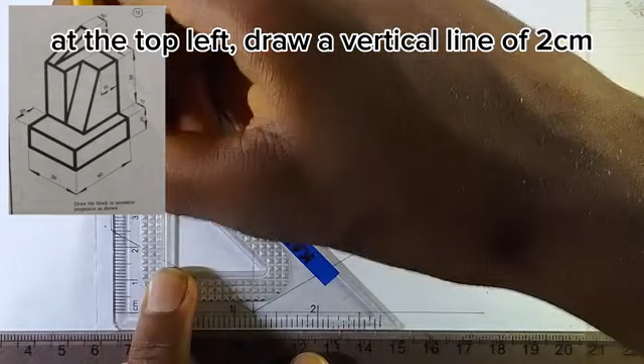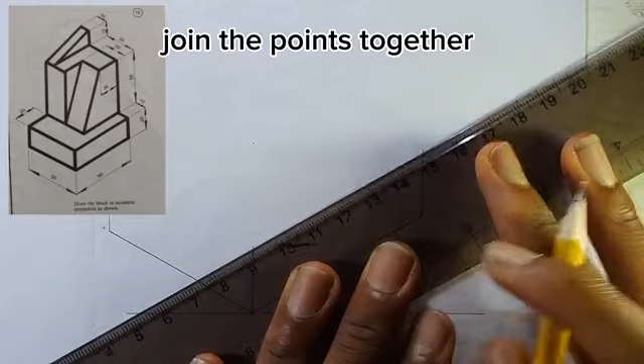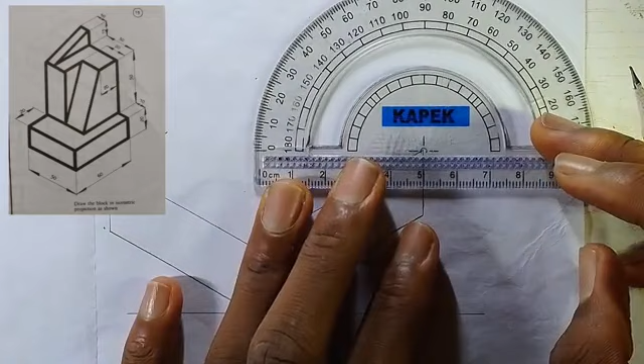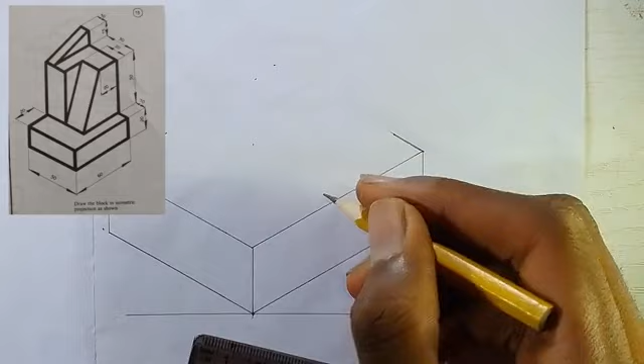Here, mark off one line of 1 cm. Instead of just drawing a line anyhow, come here and mark off 1 cm. Total distance from here to here is 6 cm, and distance from here to here is 2 cm, and this is where the block stops and continues from here. So since here is 6 minus 2, that's 4, here will be 4 cm.

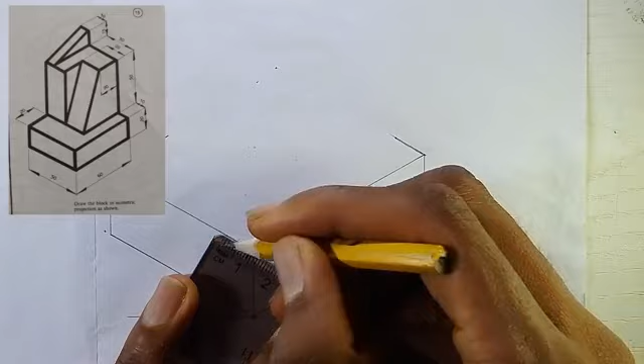So first mark off 1 cm rather. This is giving us 1 cm. Good, so come here, then from the back side draw 4 cm. 1, 2, 3, 4. Good.

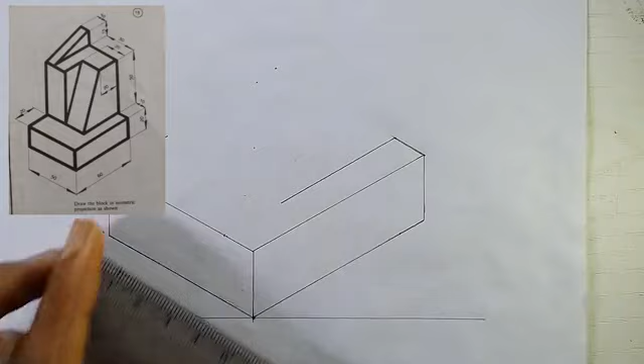Then after doing 4 cm, we draw this part too. And here is also giving us 4 cm, plus the extra space of 1, total of 5, so corresponding with this, at this part draw a vertical line.

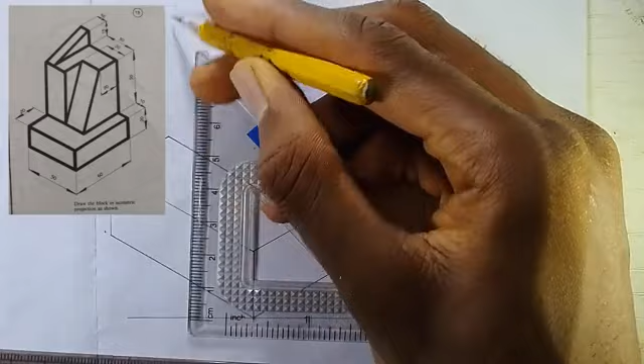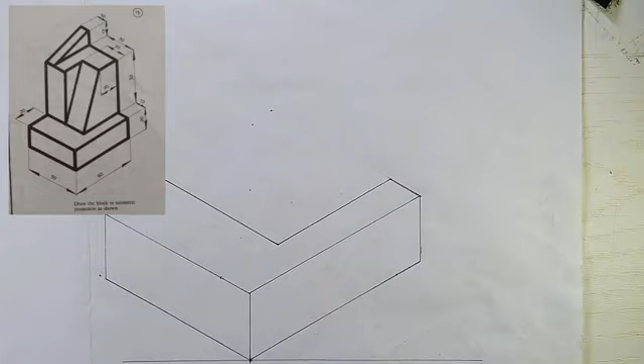Here it's giving us a total of 5, so draw 5 centimeter. We have our 5 centimeter. We also come here and draw 5 centimeter, the vertical line of 5 centimeter.

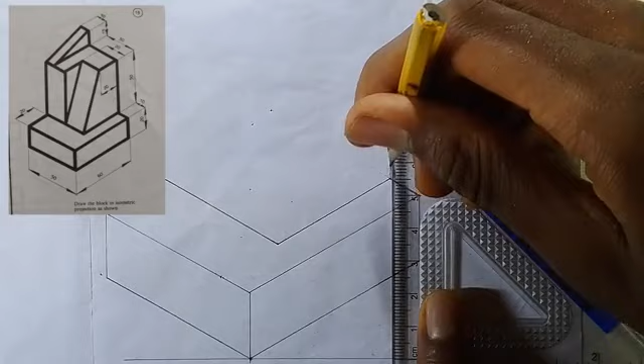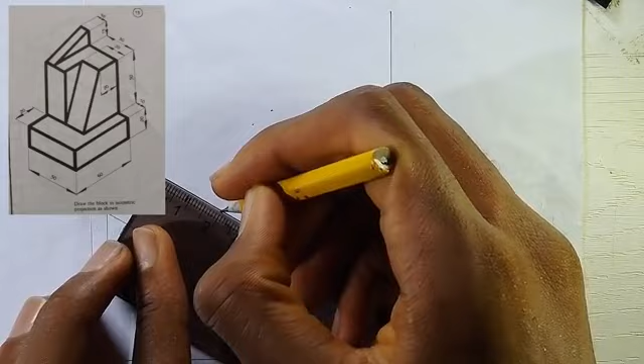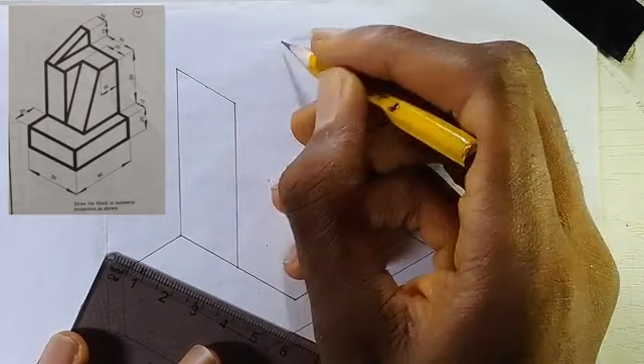So we'll come to this point and pin and mark 2 centimeter here. After marking that, we'll extend the line upwards, 5 centimeter to like others. Join this point here. Here is 2 centimeter, so we'll first come to this part, mark it, divide it into 2 here. Then we'll extend this part as we draw a line of 30 degrees, which is 4 centimeter.

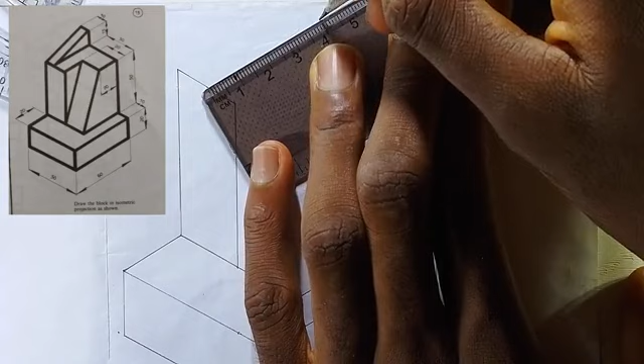So come here, mark off 30 degrees, then so this is it. Then this other one is giving us here 2 centimeter.

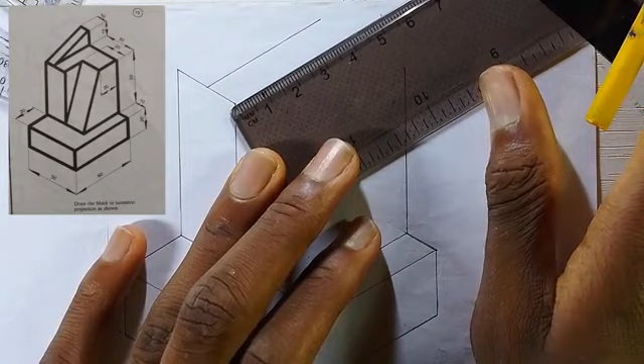So this other part here is 2 centimeter, so here it's giving us 2 centimeter. So at this point draw a line of 2 centimeter. After doing that, we'll join these 2 points together from here to here. Then join these other two together.

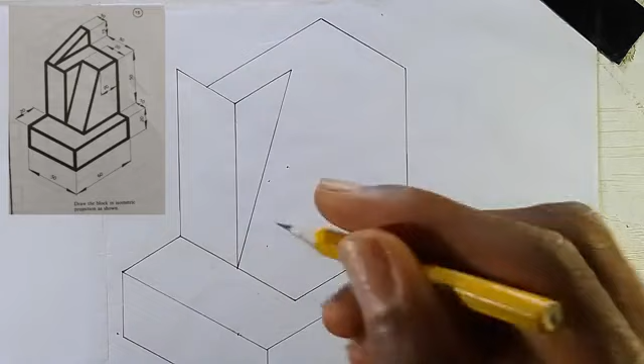Good, so it depends on how you want to draw. That will determine how your work will start, how it will end, how you construct it. My procedure for drawing this block is different from how other people would draw it, but we'll still have the same results, so you can follow mine. The point is, you need to first understand what you're given before you can decipher how to draw the given block.

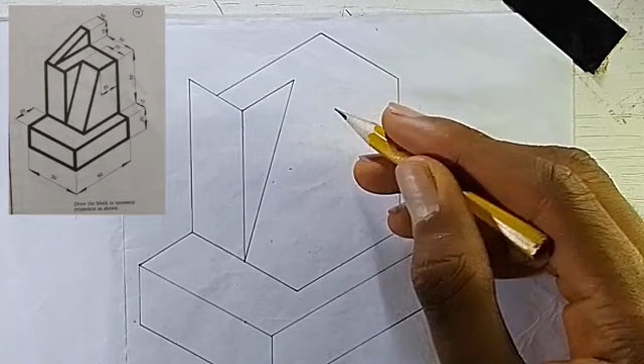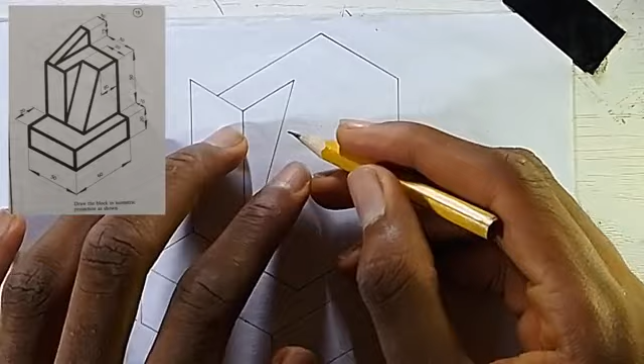So here we're having 2 centimeter, then we'll join it together with this one. What I'll do to get my 2 centimeter is, since here is 3 centimeter and here I'm having 1 centimeter, from here I'll just pin or mark off 2 centimeter. So from this straight line I'll just mark off 2 centimeter, which is here. Good, so I'm not going to draw, I'll just mark it off.

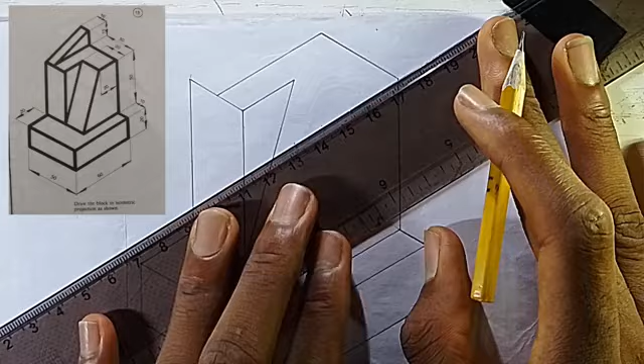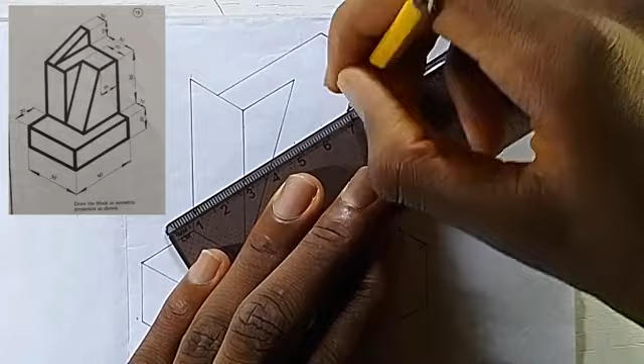So we have this, enough for us to get the shape, and this other part is going to be 2 centimeter. I'll first draw, I'll now draw 2 centimeter from here in order to have this part. So you draw 2 centimeter from here, so we're able to have this part. So we'll now join this part here, then place that part together.

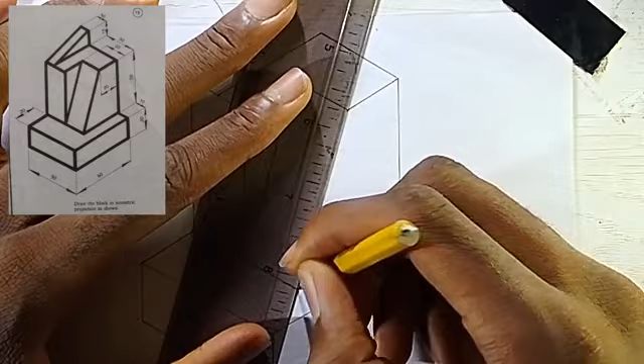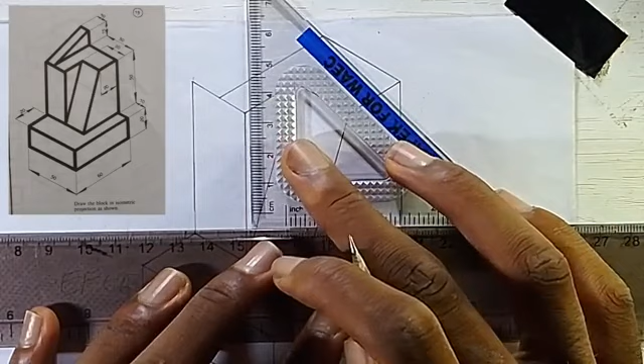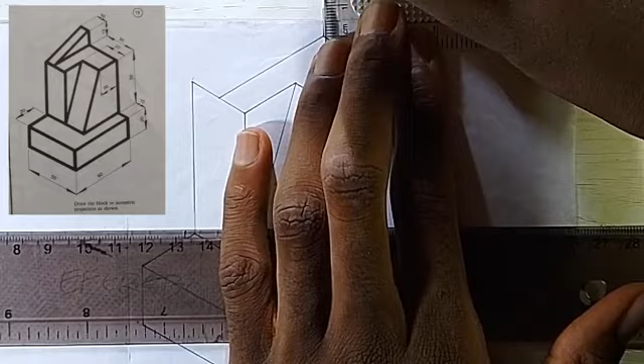1.5 cm. So first draw it so it's not able to enter. So we come here and have our 1.5 centimeter. So it's 1.5 here, then we'll join these two parts together. So that's what we are giving.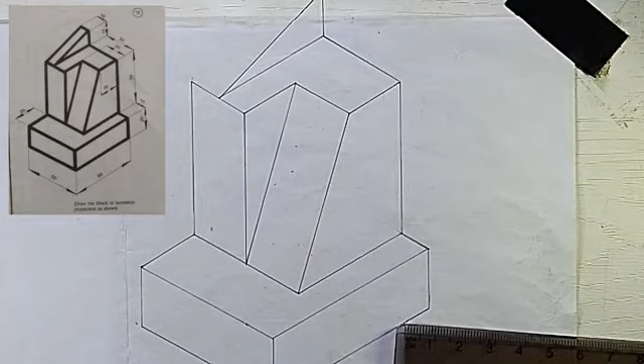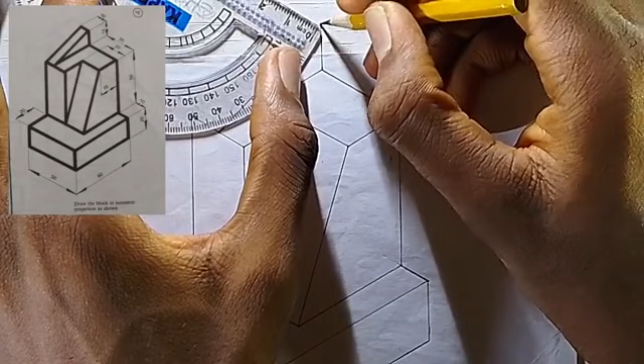Then that part here we have 30 degrees, so just draw 30 degrees into that part. Draw a line of 1 centimeter. This is a line of 1 centimeter, then we'll join it together.

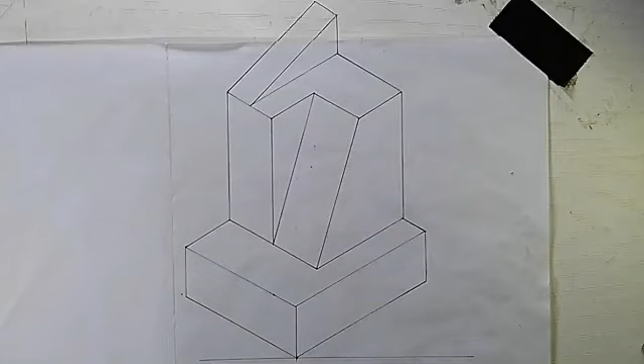So like I said before, everybody has their own method or procedure for doing their given block. You need to first study your work, then decipher how to start it to give a successful ending. It would be preferable to start your work below or at the bottom part of your A4 paper, so you won't make the same mistake I made here. I apologize for this, sorry about it. This is the block and we are done with drawing this block.